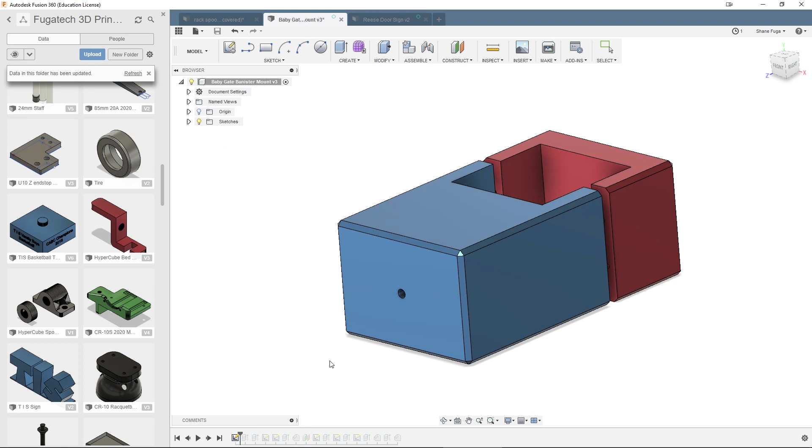So here we are in Fusion 360, and here is what I have mocked up as the baby gate mount. Not too many processes. I am not an expert on Fusion 360, but I like to show my process because people will comment and tell me why I screwed up. So we're going to take this all the way back to the beginning with our very first sketch. And all I did was measure out how wide the actual metal pillar is. It's 51 millimeters wide. So I figured, well, let's make it square, 51 millimeters. I now think that's a little too much, but that's okay.

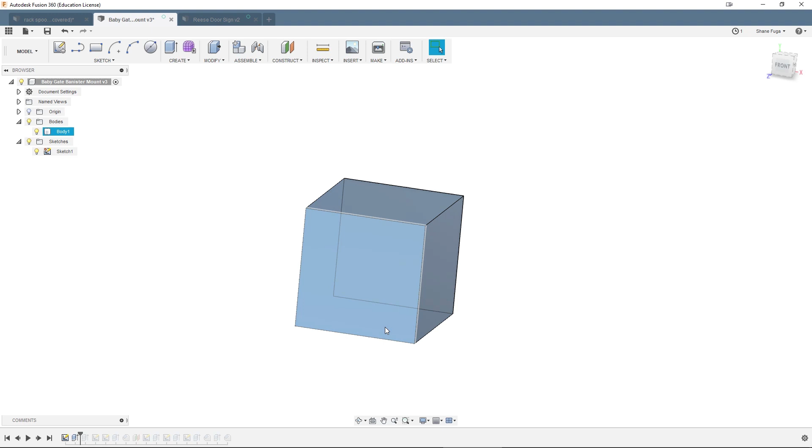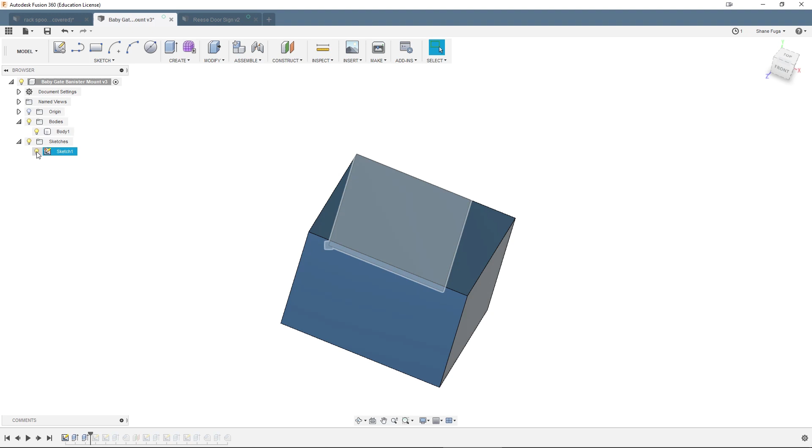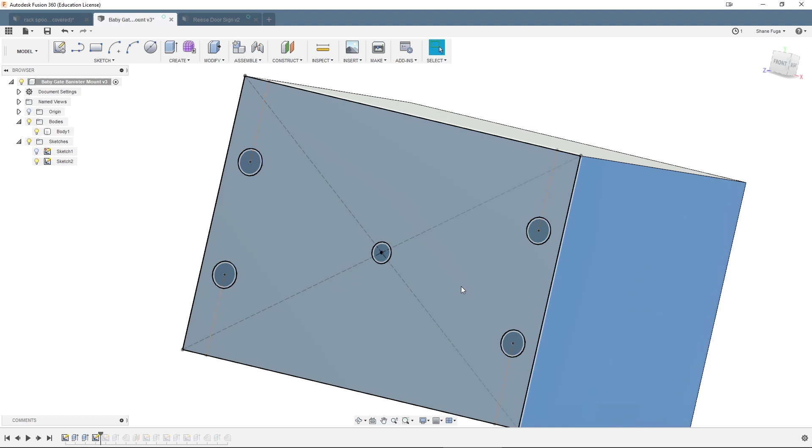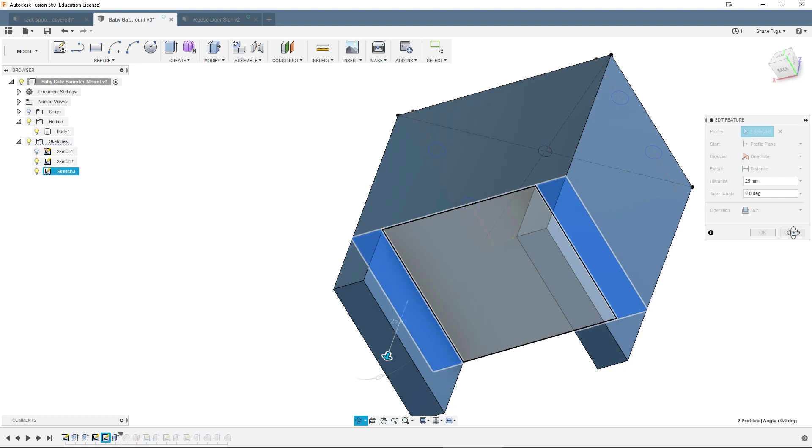So next I went ahead and mapped out all of the screws with this sketch here. I have the one right here in the middle, and then I have these 4 around the sides. I originally put these 4 on the front because I was going to do it a certain way with bolts, but I ended up changing that up, so I didn't need that. Then this next one was to divide in the back. Here on the back I drew 2 lines down, 10 millimeters on each side, and extruded those out, and these go around the pillar, and those are 25 millimeters. So this will be part of the hugging action of that square tube.

All right, next I went ahead and added a chamfer to all the sides just to make them a little bit rounded off. I didn't want to do a fillet, I don't know why. Chamfer looked cooler in this application, but nothing is chamfered here on the inside because the pillar is going to be right here in the middle.

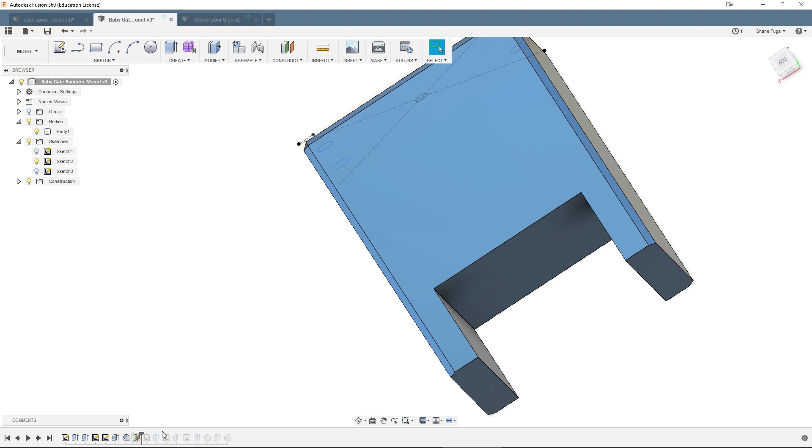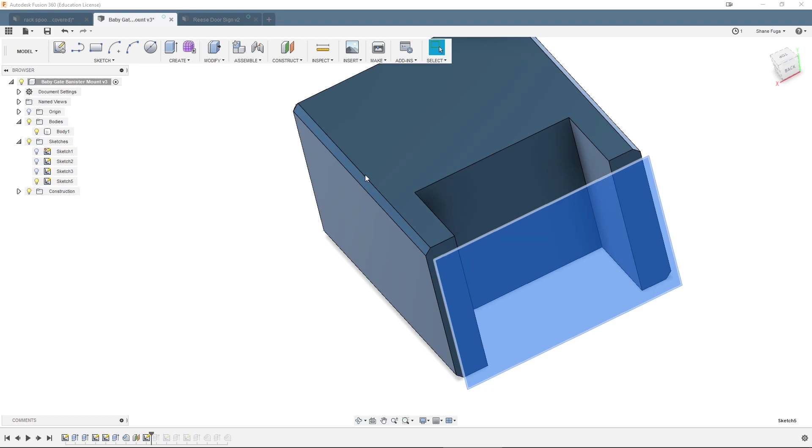Next, I had to offset my build plane, just a little bit off the back. That way I could start my next sketch for the next piece behind it and have everything lined up perfectly. Next I drew up a sketch here. If we open it up, it's going to be 51 by 71 because remember I added that 20 millimeters on, and it lines up right there with it. All right, next we're going to go ahead and extrude that out.

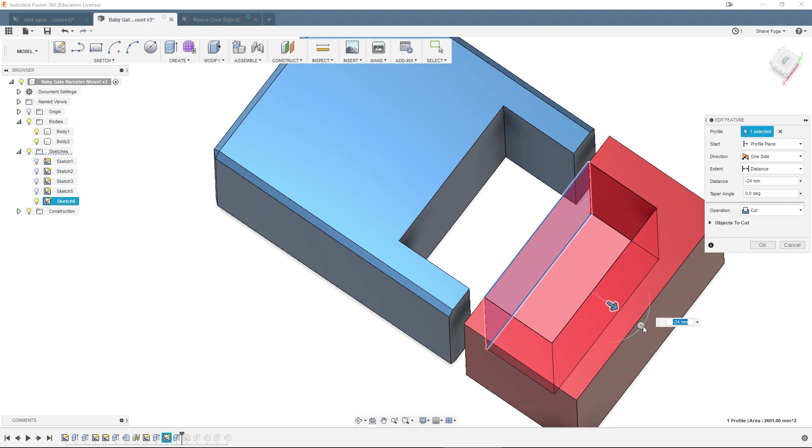And then we're going to make another sketch on there. And this is where we're going to actually cut out a little bit so that the pillar fits in there. The pillar is 51 millimeters wide. So this extrusion here was only 24 millimeters. This one over here was 25 millimeters, which gives me a 1 millimeter gap. I'm not sure if that's going to be enough. I might need to increase that later, but it's worth a shot right now.

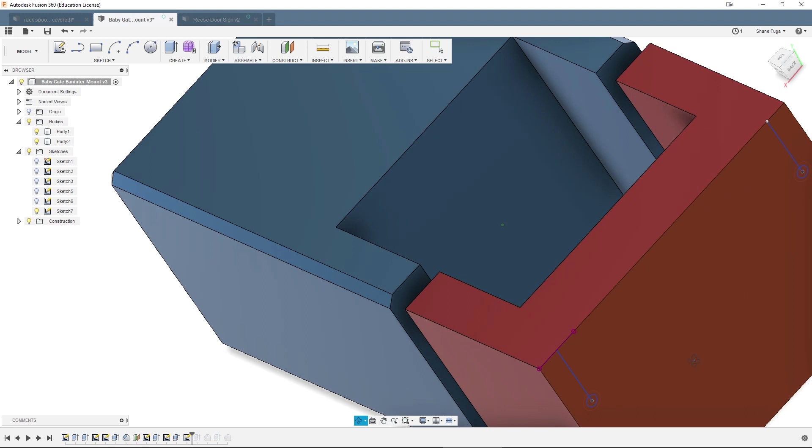Okay, next we're going to go to the next sketch here. And here you see on the back I have plotted out the holes again. So these are actually where I'm going to screw it in from the back. So it's going to go through this into here, but I have to make some holes for those screws first. So I'm going to go ahead and extrude those holes out. If you go look at that, you can see how they are cutting in through both pieces.

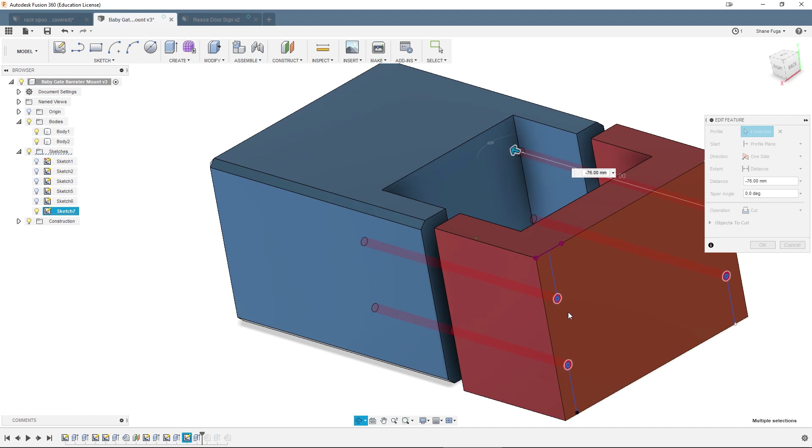I just did 76. I don't know, I just kind of guesstimated a little bit longer. This might not be long enough, I'm not sure. So we'll end up seeing how that ends up going. I also might make this part a little bit bigger than this hole down here, just so they're not gripping on this part. I don't need them to grip on here. I need them to grip on this part. But we'll see how it ends up going.

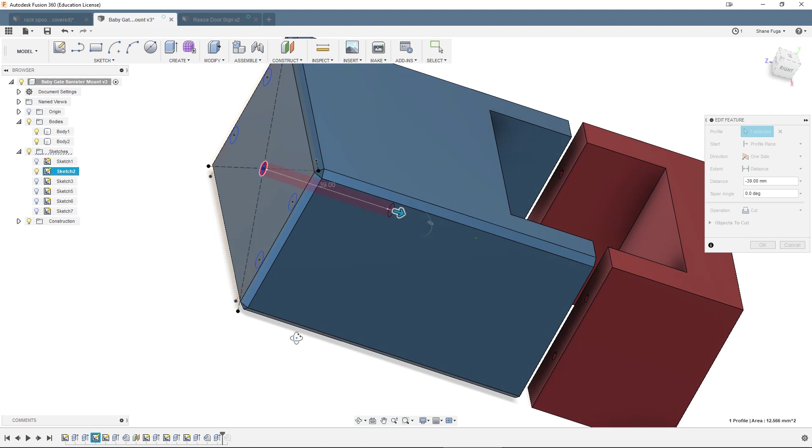I added chamfers to this to kind of make those countersunk. Turn that sketch off. And then I went ahead and extruded. What did I extrude there? Oh, I extruded the front hole there, so that gives you space for the bolt to go through the front, or the eye hole. And then I added chamfers to the back to match. And these are just, I believe, a 2 millimeter chamfer. So that was enough for that.

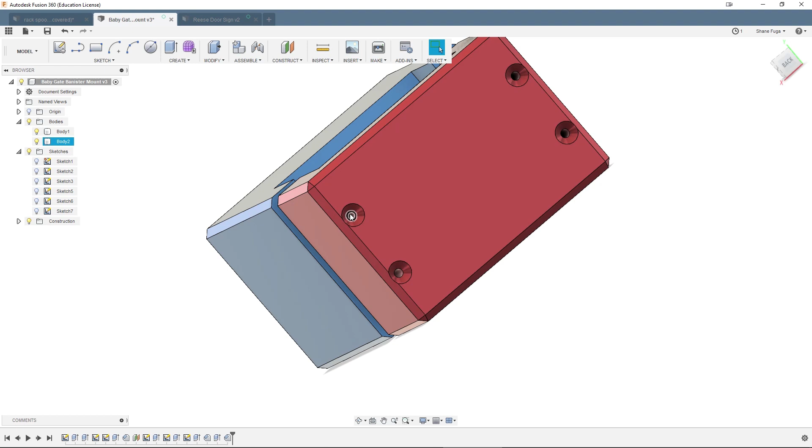And then, so there it is. So the screws are going to go here in the back. They will come through, they will grip into the front piece and squeeze it around the pillar. So I'm going to go ahead and get this printed out, and then we can see if this is actually going to work out. All right, so after all that, and these were about 7-8 hours to print each, I've got a set.

So this is my version 2 that I did. I'm pretty sure these are going to work. I didn't actually test this set before I started this video, so I'm hoping that they do. And they're very simple. They're just going to clamp on to this frame. Easy enough, right? All I did was make it wide enough and a little bit wider so that screws could pass. So we're going to be using just regular old drywall screws for this, because that's what I have around. And hopefully this will just hug onto this pole really well.

And right here in the front, there is a hole for the eyelet to go into. So eyelets are really easy to work with because you can just put a screwdriver in the front of them, and it makes them really easy to sink in. I need to try to make sure that I made these the same because I already have one done. I just got to make sure I try and even these up, which should be relatively easy once they're in.

Now I'm really excited for this because this will make this super adjustable. I do have it mounted on the wall over here, but I really had to get those right when I first set those in because that was it. There's no re-drilling the concrete wall, and I had to re-spackle everything, I had to repaint everything. It just wasn't going to happen. Had to get that right. So having these is going to give me a little bit more wiggle room as to where exactly these are going to go on this metal railing.